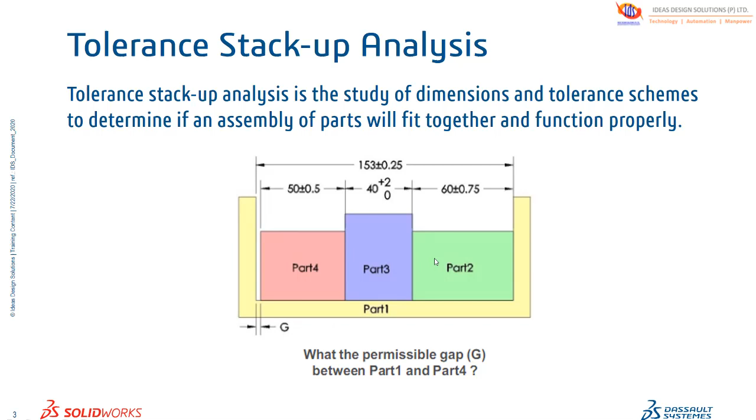There are various tolerance schemes attached to each dimension, so how do I calculate this? For calculating this, we can use manual methods, or we can use a tolerance analysis software which is integrated in SolidWorks.

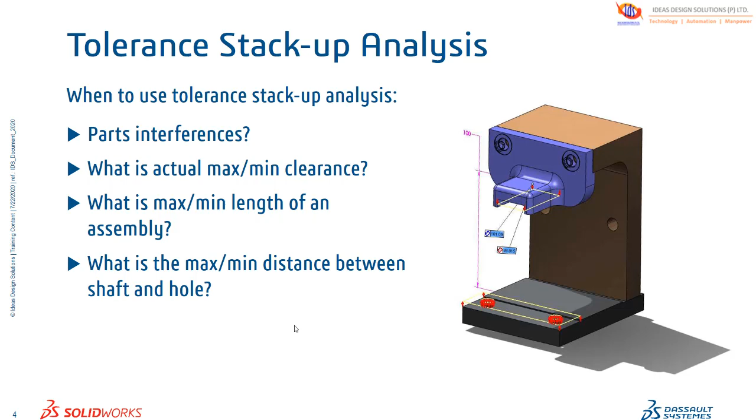So when to use tolerance stack-up analysis: if you have parts that are interfering with each other, and if you want to see what the actual max-min clearances are, what the maximum length of an assembly is, and if you are interested in seeing the maximum distance between shafts and holes, then you can do a tolerance stack-up analysis.

There are two types of tolerance stack-up analysis that we can do in SolidWorks Premium. The first one is worst case analysis, and the second one is statistical RSS, root sum square method.

In worst case analysis, here is an example of a four-part assembly, and there are tolerances attached to each dimension. So what I will do is calculate the minimum gap between part number 4 and part number 1. For doing that, I'll take my complete length of the cavity, then I'll just minus the maximum value of these three parts.

Taking a worst case scenario, I'll take the minimum value of this cavity, and I will just subtract the maximum value of these three parts from that value. So here I see that there is a 0.5 value coming, and it is in minus convention, which means interference is going to happen.

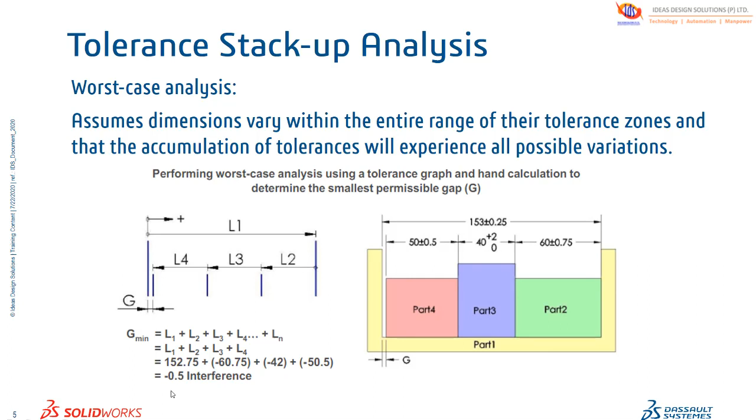After that, there is RSS, that is root sum of squares analysis. In this method, I want to calculate the minimum gap in this one as well, or maximum gap. So what I will do is calculate the nominal gap between these two parts, part number 4 and 1, and I'll add or subtract the root sum squares of the tolerances.

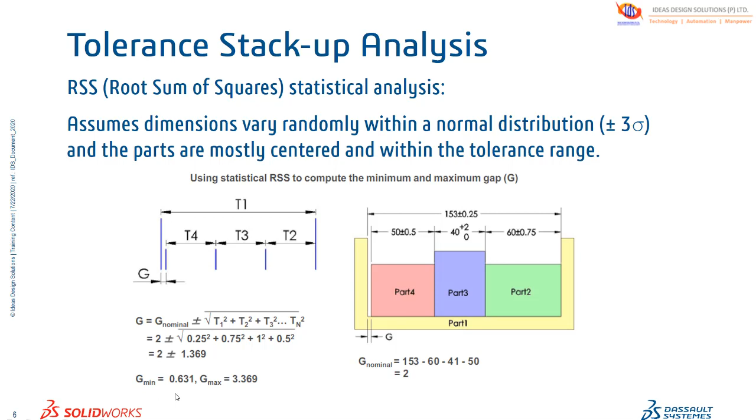So here is my nominal gap, that is 2, and here are the sum of tolerances, which includes this tolerance 0.25, 0.5, then 0.75. These are the tolerances, and after that I'm getting a minimum gap of 0.631 and a maximum value of 3.369.

Now we are talking about what the TolAnalyst tool is in SolidWorks Premium. The TolAnalyst tool lets you perform max and minimum tolerance stack-up analysis on parts and assemblies. Also, you can do an RSS min-max calculation in the software itself.

So basically, you get three analysis results from the software: the worst case max-min value, the RSS max-min values, and the contributor list by percentage. So what is a contributor list? Here is an example of contributor list dimensions.

Here is dimension 1, and these are each of the dimensions that are referring to that particular face. So this particular dimension, or this particular face, is contributing 18.46% to the final study.

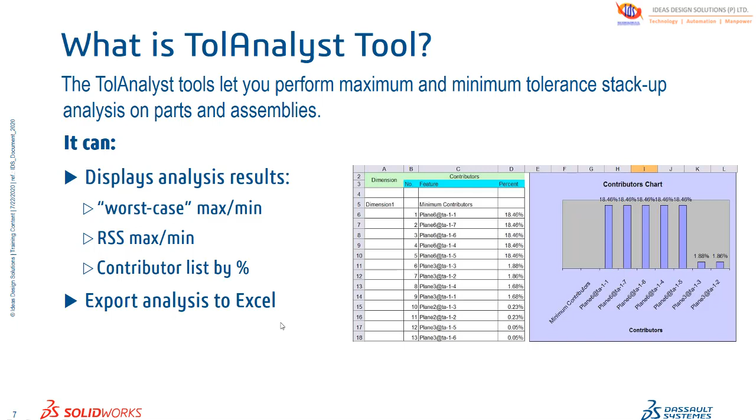So what I can do is double click on my tolerance and just change that tolerance so that I can get the max-min value within my range. Also, you can export this result to Excel so that you can prepare some documentation for that part as well.

Why do we need a TolAnalyst option in SolidWorks? If you are performing manual tolerance stack-up analysis, that takes so much time. If you are designing high precision components, you might need TolAnalyst. If you are designing products that are going to be produced in high volume, then also you will need tolerance analysis. And anyone who is currently suffering from assembly fit problems will be requiring this TolAnalyst study tool.

What benefits does this tolerance analysis tool offer? Using the TolAnalyst tool, you can reduce the prototypes for testing assembly fits. You can optimize the tolerance schemes for your assembly and manufacturing. It is a fast evaluation method for tolerance stack-ups, and you can see the graphical display results within the SolidWorks window itself. Also, you will be able to know what is the worst case design that can be produced using those tolerances.

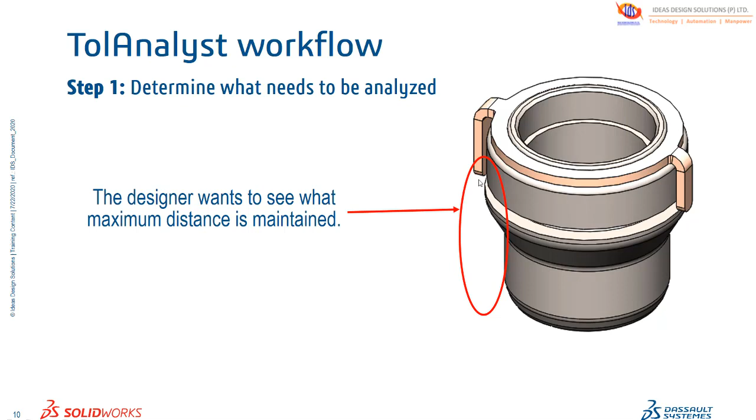So moving on to our workflow. This workflow actually takes 8 steps, starting from what dimensions we want to calculate. For example, here is an assembly of two components. The lower one is a spigot and the upper one is a ring. The designer wants to calculate the maximum or minimum distance between the base of this spigot and this ring face.

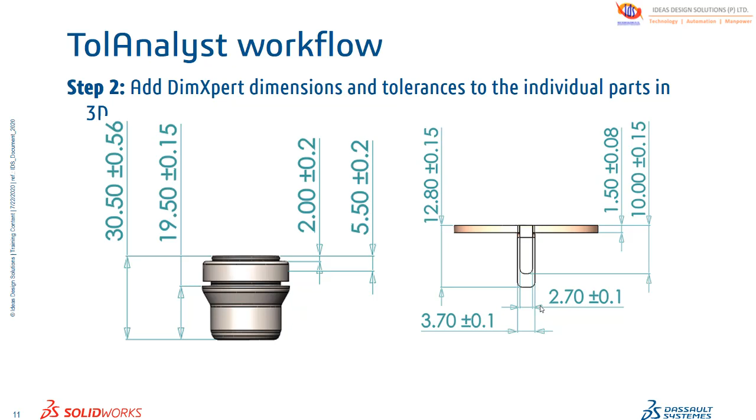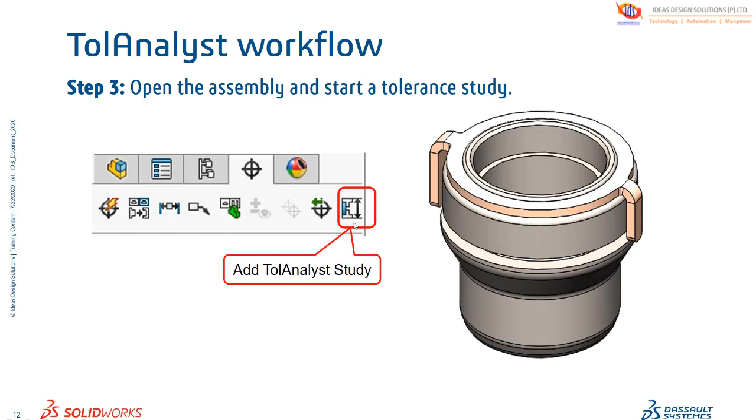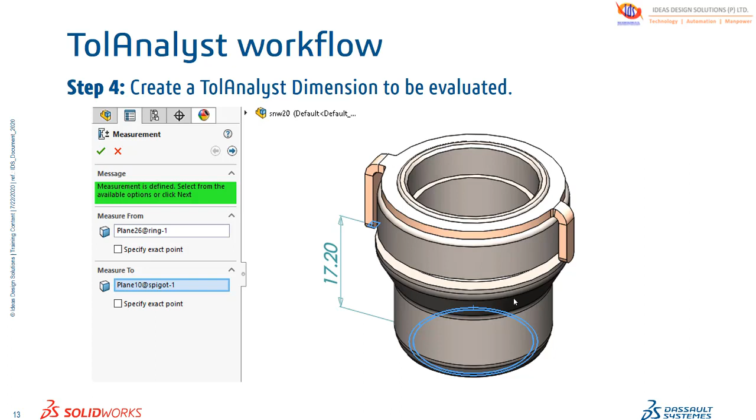In step 2, I'll dimension my parts individually based on some tolerance criteria. You have to individually give DimXpert dimensions to every component that you are going to analyze. After dimensioning each component, you'll come to your assembly, and in this tab there is an add TolAnalyst study option. Just click on this small icon. Then select your two planes or whatever you are going to measure. You can also select two cylindrical faces, two points, or different combinations of those.

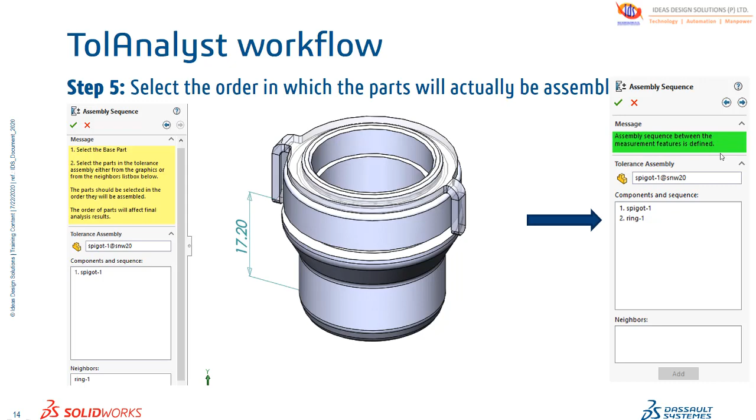After that, you will select the assembly sequence, like in what sequence you are going to assemble your parts. So first I'll take the spigot, then I'll assemble the ring over the spigot. After that, you will see that an assembly sequence between the measurement features is defined, and you will click on next.

In the next step, I will define my references. For example, first I take the spigot, and after that I'm assembling the ring. So how do I assemble that ring? What would be my first reference? My first reference to assemble the ring to this spigot is the concentricity of these two components. So this simple hole will be my first reference, and here is a plane where the base of this ring sits on the top of this spigot. I'll choose this as my secondary reference.

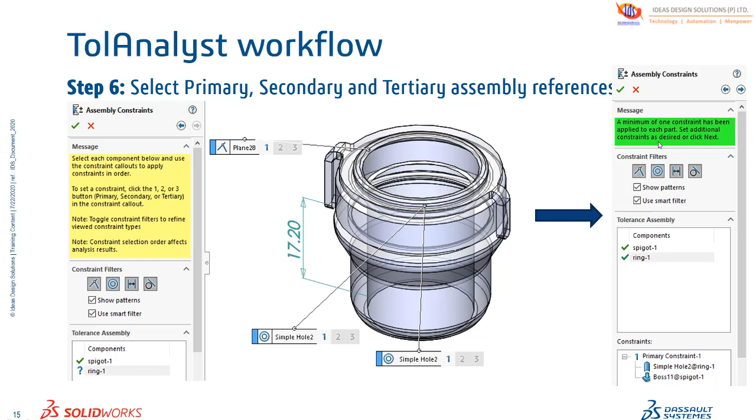After selecting these two, I can see: minimum of one constraint has been applied to each part, set additional constraints as desired or click next. You'll see this message in a green window. Then you can go ahead and click next. After that you can see this result. Here is an analysis summary tab. You can see the nominal value, the worst case min and max values, the RSS min and max values, and just below this analysis summary tab you can see the contributor list also.

Okay, so here is a dimension that is contributing 78.87% in this study. We can double click on this dimension, change its tolerance scheme, and recalculate our study using this icon over here.

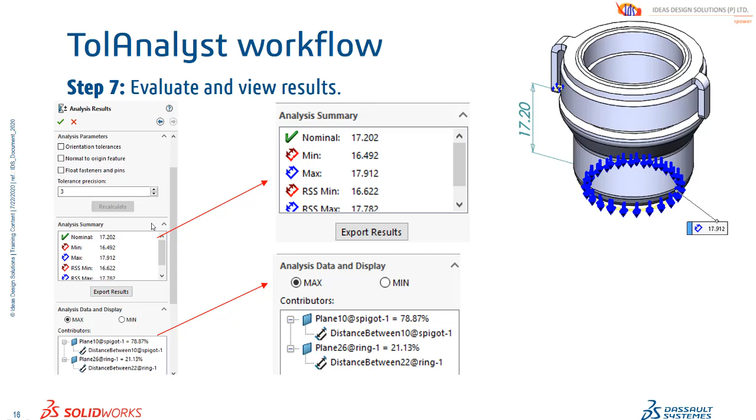After seeing the visual feedback, you might need a report. For generating a report, just click on export results and you will get a detailed Excel file out of the SolidWorks window. In the Excel file you can see the minimum contributor dimensions, the maximum contributor dimensions, and at the top you can see the final values that you are going to need. Here's the nominal value, here's the minimum value. Basically whatever you see here, you will get at the top in Excel.

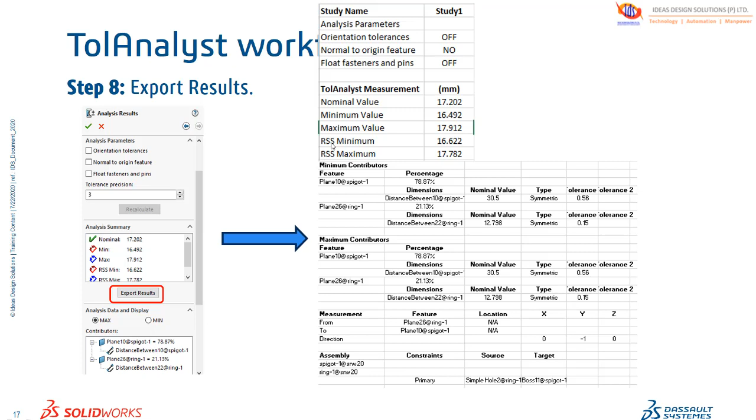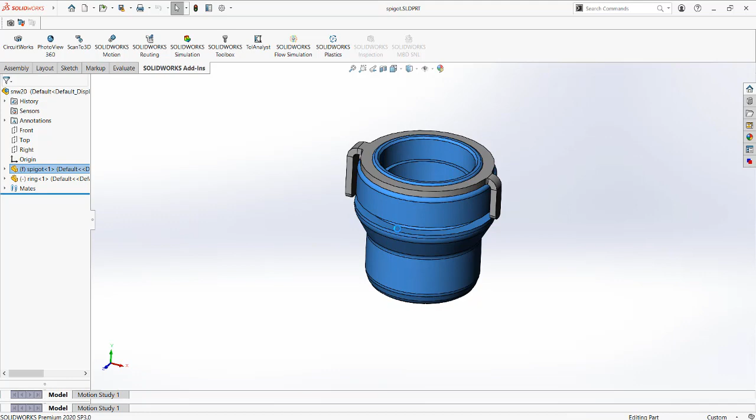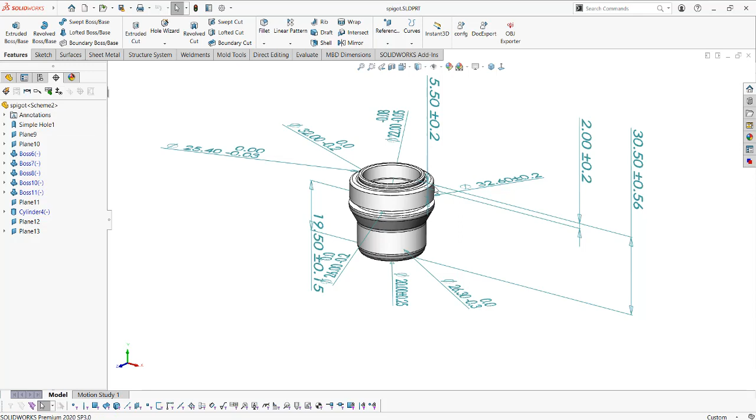Let's move on to our SolidWorks window to see a live demo. Here's my assembly and it contains two parts. Let me open this part. Here you are seeing some dimensions. These are not the dimensions you gave during the sketching phase. These are DimXpert dimensions. So how do you give DimXpert dimensions? Just click here on the DimXpert manager tab and select basic location dimension or basic size dimension, and dimension these features. You can also choose from the dimensions in the DimXpert command manager.

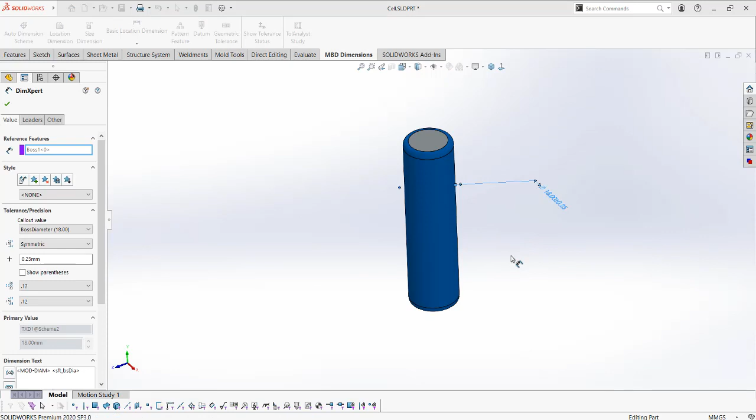And the study is set up. Let me show you how to give DimXpert dimensions on a separate part. Here is a simple example. I'll click on size dimension, click on this face, and put this dimension over here. To define the tolerance scheme for this dimension, I'll click on this dimension, then select the tolerance type. Here I'm selecting symmetric type and giving it a tolerance of 0.25 mm. All right.

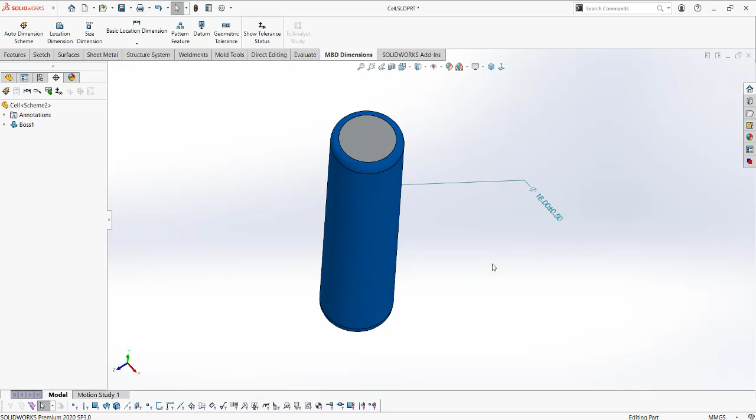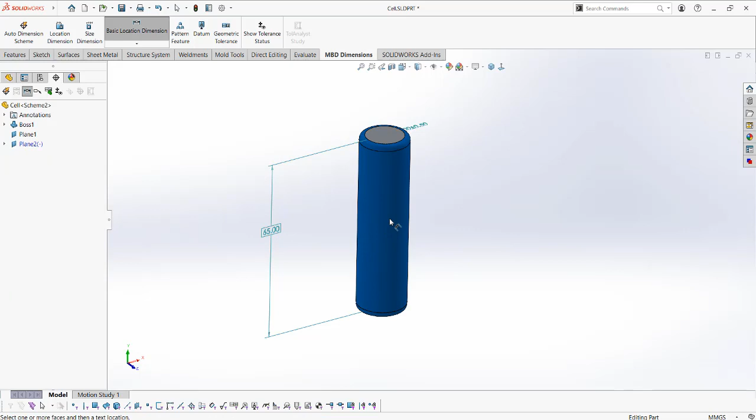So here is a basic location dimension tool as well. You can define that. And you can do the similar dimensioning scheme at other features as well.

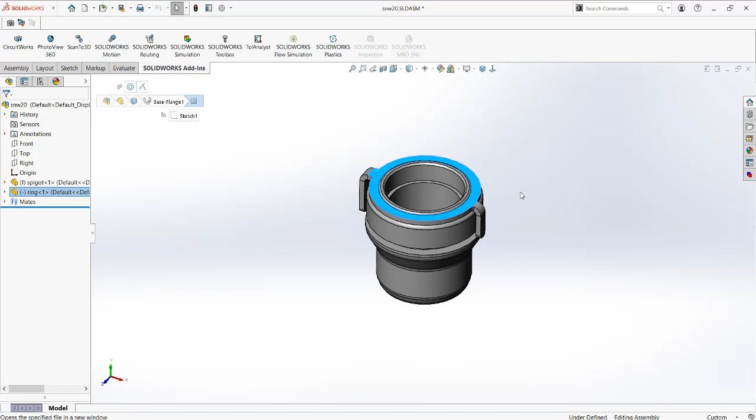Let me just take you back to my SolidWorks tolerance study. I'll just close this part. I'll open this part. And here's the dimensioning scheme for this ring assembly, the ring part as well. I'll close this one. And so before doing the analysis, let me just show you one interesting thing over here.

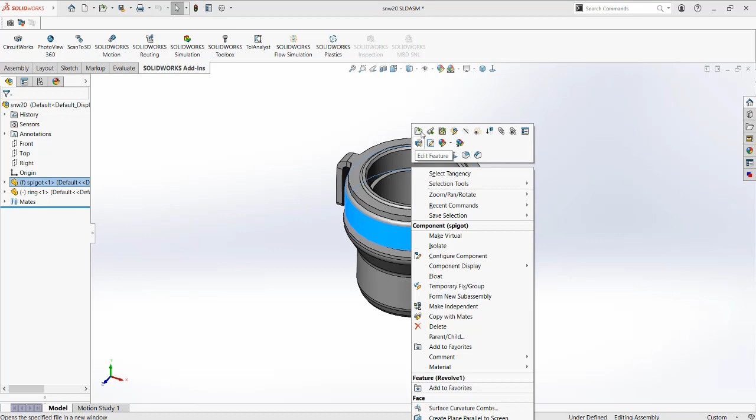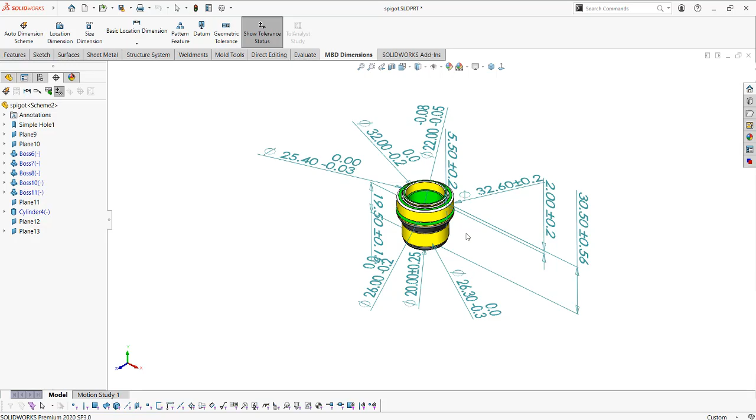Okay, so here I have given some tolerance scheme to this part. So if I go to the DimXpert tab, here I have a show tolerance status. So if I click over here, I can see all the yellow faces. So what the yellow faces indicate, it indicates that these faces do not have any tolerance defined for that.

All right, so if the faces are green, then the tolerance scheme is completely defined. If it is yellow, then it is underdefined, and if it is red, then it means that face is overdefined. So it is similar to sketching dimensions. Let me just close this one, and I'll do the tolerance study on these two parts.

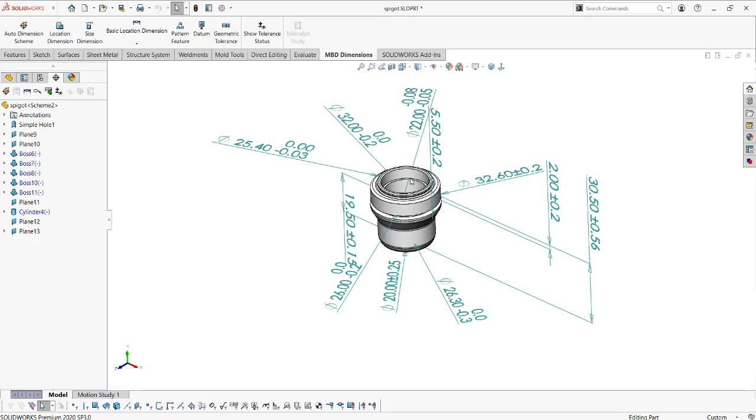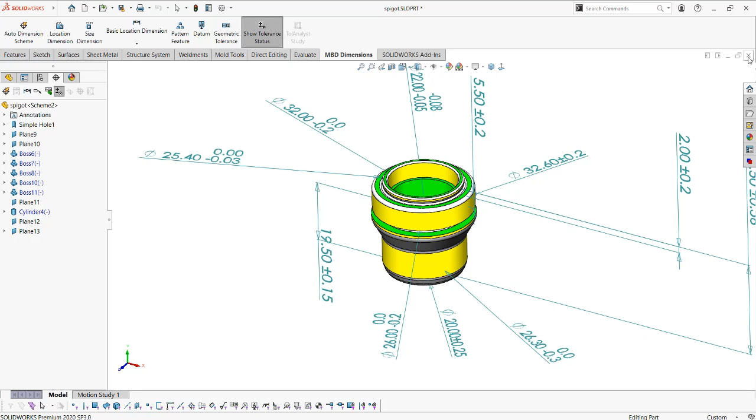So you might say that if I'm doing a TolAnalyst study, and if the tolerance scheme is not properly defined, how will the tolerance study be done? So for doing the TolAnalyst study, all the tolerance schemes that might affect my dimension are already green faces. Okay, so I'll just close this one, discard changes.

So I'm in the assembly window, and here I'm not seeing my DimXpert tab. So for showing the DimXpert tab in your assembly window, you'll have to choose this TolAnalyst add-in. So you'll just click on this TolAnalyst add-in, and you'll be able to see this small DimXpert manager tab. So after that, I'll click on this TolAnalyst study.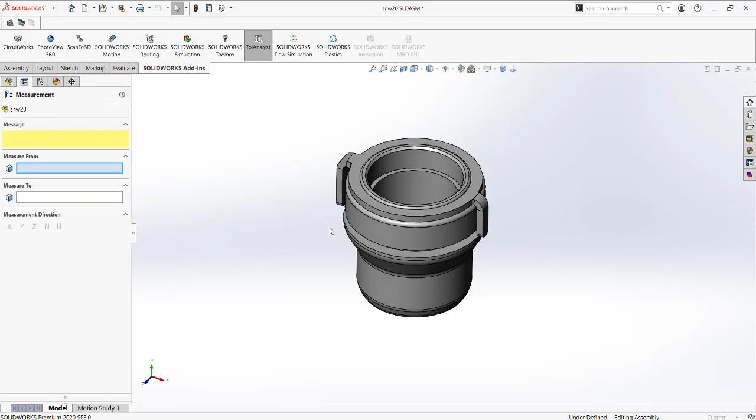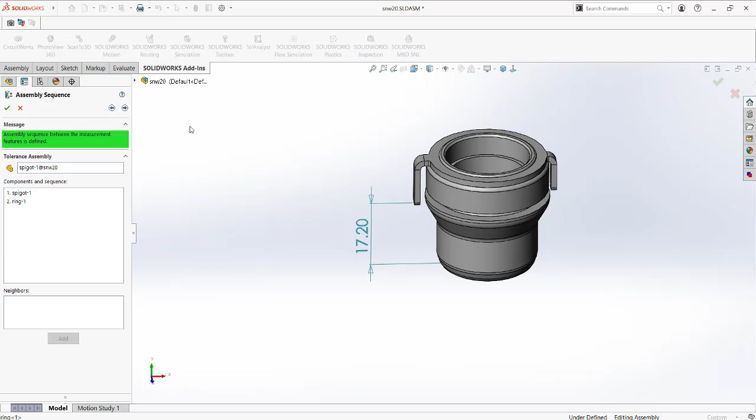Then I'll choose these faces, and it's showing me the nominal value as of now. I'll click on next. I'll just select the parts in sequence, how it is going to be assembled. Just click this one, after that click this one, and then click next. Here it is asking me for the reference.

So when I assemble this part in SolidWorks assembly, I have given some mates. So I need to set some references with respect to those mates. So I need to prioritize which mate I'll be doing first, or which reference I'll be using first to assemble this part on the previous part.

So here, if I want to assemble this ring over to this spigot, I'll try to make it concentric first. Okay, and then I'll just put the bottom face of this ring assembly on the top face of this spigot part. So only one reference is sufficient. Here it is showing a minimum of one constraint has been applied to each part. Set additional constraints as desired, or click next.

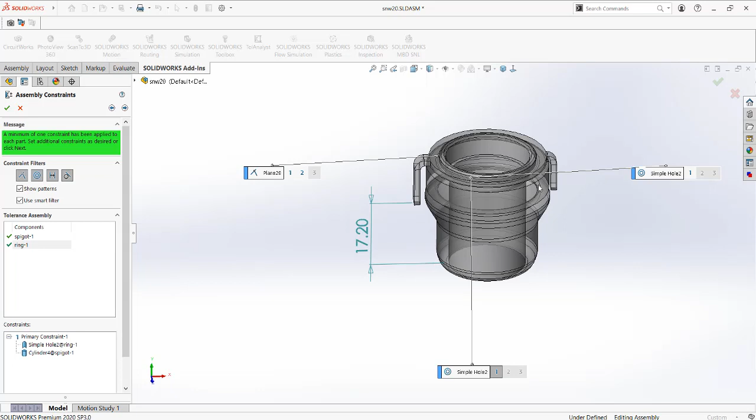So whatever references or constraints you are giving it, it is going to affect your tolerance study. So here I have given just these cylindrical faces as my primary constraint. So my tolerance study will not consider any other parameters when it is analyzing this part. So I'll click on next.

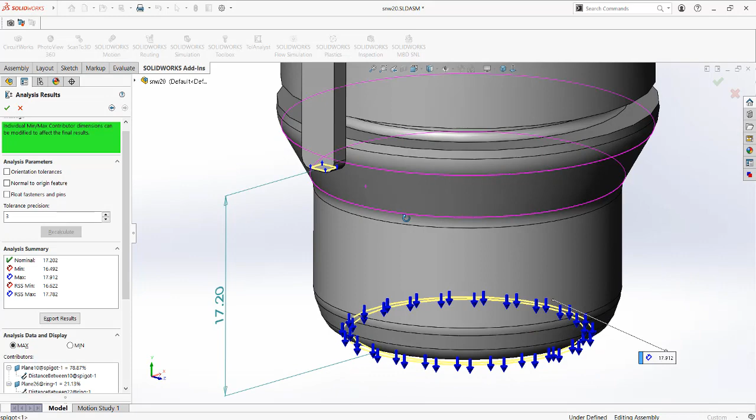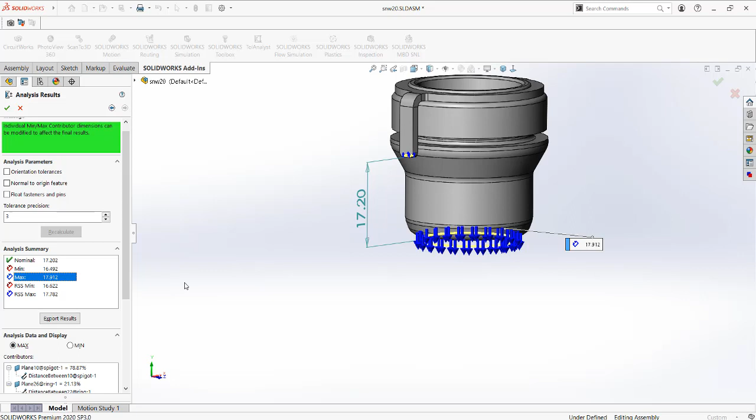And here it is showing me the results, and here is the graphical view as well. You can see this value is the worst case maximum, as you can see in the analysis summary window. So this is the maximum value that can be achieved in this part, and here is the minimum value, and these are the RSS min and max values. Also these are the contributors list.

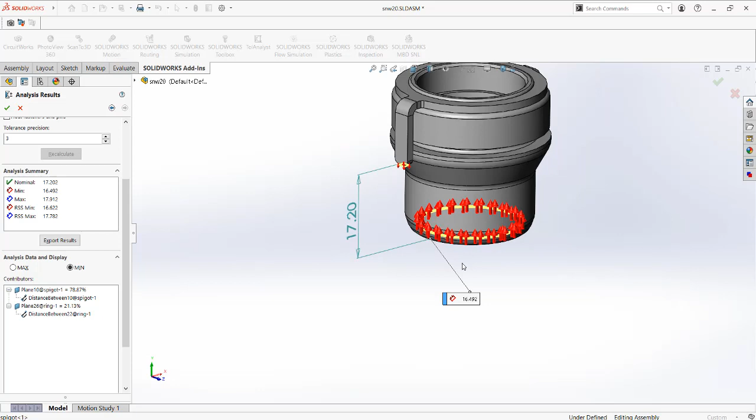And if I choose the minimum, it will show me the updated graphical view, and it will show me the updated contributor list. So this dimension is affecting this whole TolAnalyst study by 78.87%. So I'll just double click on this one, and I'll change the tolerance to 0.25, click enter, and recalculate my study, and it will update the results.